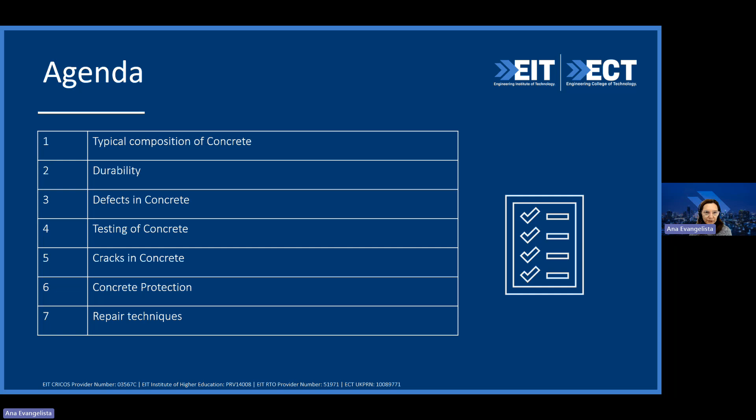So the main point today is to understand deterioration in concrete, because existing structures and sometimes new constructions in a very short period of time show significant defects and deterioration. Just to highlight, when we talk about concrete here, concrete is a composite material.

At the end of the day, we need to understand the characteristics of each component. I believe you're totally familiar with this material, because concrete is one of the most used construction materials around the globe. It's a combination of cementitious materials, normally combined nowadays in different countries, cement Portland plus any type of pozzolanic materials such as fly ash or silica fume, depending on the country. We also have fine aggregates, and we cannot forget air is part of our composite, water, and coarse aggregates.

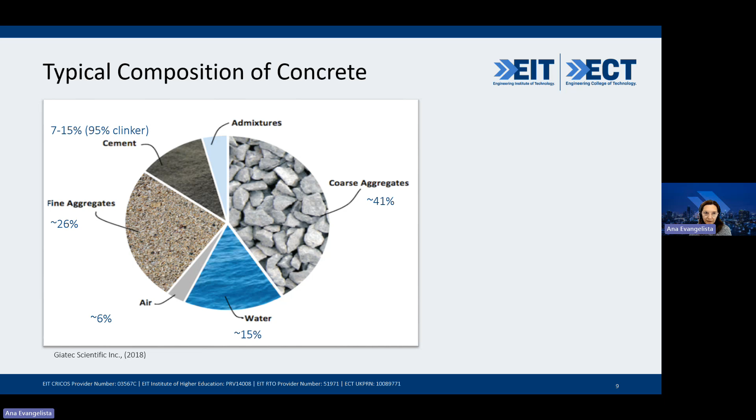Usually, modern concrete incorporates chemicals - chemical admixtures and mineral admixtures. So when you have all these combined, we can identify a variety of characteristics of the final product, and the final product is concrete. So just to illustrate this initial part.

So when we think about existing structures, we need to understand a bit more in terms of the durability aspects. When you talk about durability, straight away you need to think about concrete quality. It also relates to the design, the service life of this material over time. And we just ask ourselves why in some situations we have severe deterioration of concrete, which in future will require more investment in terms of repair, strengthening, and maintenance.

So we have some simple factors to consider here. It can start at the design stage, or in terms of very poor, bad specifications and workmanship. Unfortunately in the construction industry, we still need lots of training for our laborers. I'm based in Australia, but I'm from South America - we can identify this type of issue everywhere.

When you think about quality of concrete, we have a combination of characteristics to keep in mind - permeability, strength. We have the concrete components, as I mentioned, depending on the type of cementitious materials. More and more we are working with a combination of cement Portland plus pozzolanic materials and selection of aggregates. So we need to understand these are the fundamentals of durability.

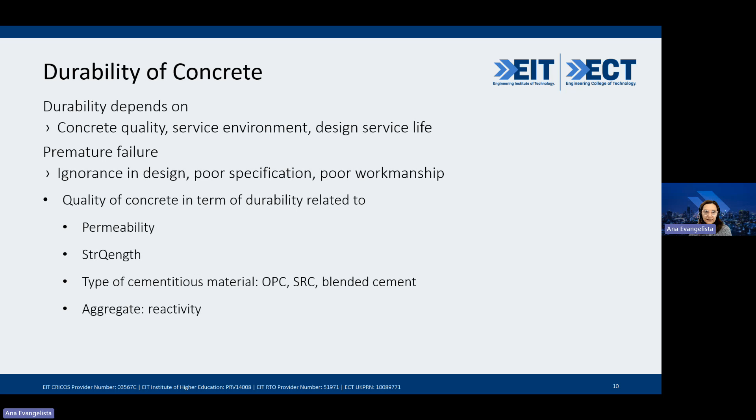A bit more here in terms of concrete permeability - why do we need to understand this? Because this will provide us the fundamentals we need in order to understand what happens in future in relation to simple defects, such as cracks, which you're going to be talking about later on. So permeability in concrete depends on porosity of this material, the pore size distribution, and continuity of those pores. For example, if your structural element is in front of the sea, it's about the ingress of chlorides. Another factor that deteriorates concrete is carbon dioxide - carbonation of concrete.

So my opinion is we need to do our best as civil structural engineers, or if you are working with concrete technology, in order to ensure that you produce high quality material. Because then you can avoid, or at least postpone, this type of defect from occurring. So in my opinion, it's much better to dedicate effort and time to producing high quality concrete rather than doing repairs in future. It's about prevention - if you understand the concepts of how to produce high quality concrete, you can minimize the defects that happen in future.

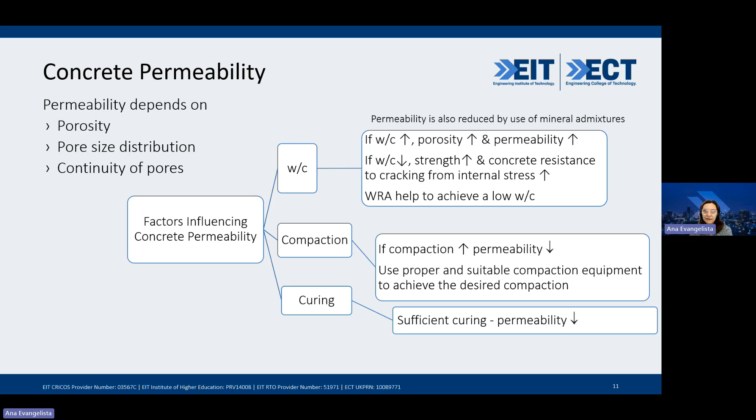Thinking about the structural point of view, aesthetics is something that concerns us, but mainly structural integrity. That's why consequences of this type of chemical attack can include expansion, cracking, and can result in the collapse of structure. So how can we minimize this from happening?

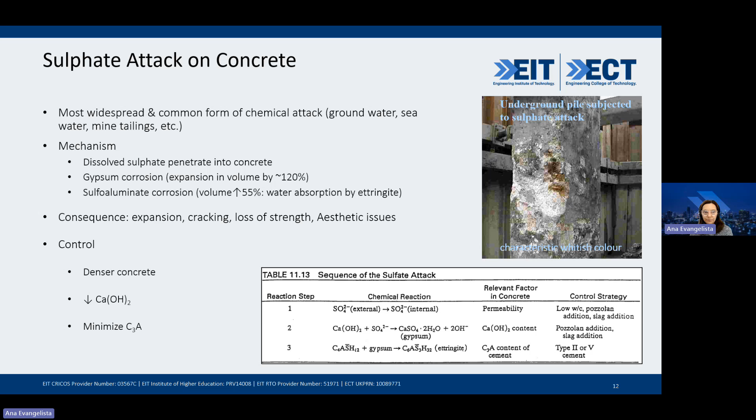Control measures here in order to avoid this happening: denser concrete, when it's about our concrete mix design. When you have a proper mix design, we can produce a denser concrete, reduce permeability, and try to mitigate the ingress of sulfates and minimize the amount of calcium hydroxide and tricalcium aluminate. So these are some points we can highlight about sulfate attacks.

Another problem we talk about here is shrinkage, because in future, when you think about the repair of concrete, we need to think about why cracks occur in concrete. Shrinkage is one of the factors, one of the main challenges we face when working with concrete, because it starts from the fresh concrete.

So when it's about any type of characteristic of concrete that can end up in cracks or other types of defects, we normally have this procedure to follow. We need to understand - I don't need to go one by one here, you're going to have these slides for you later on - but we have a kind of algorithm to follow.

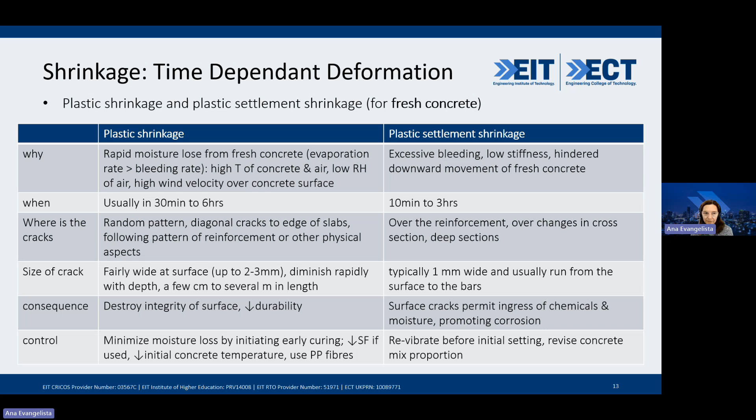Here I'll just illustrate, I don't go into details one by one, but when you talk about shrinkage, we need to understand the different types of shrinkage in concrete. It's from the plastic shrinkage when it was in fresh concrete, but here you also have dry shrinkage, very easy for us to visualize. Concrete just shrinks over time, and you can imagine why cracks happen, because the concrete strength is not at the level in relation to the internal stress applied in concrete. So that's why you have crack formation and propagation.

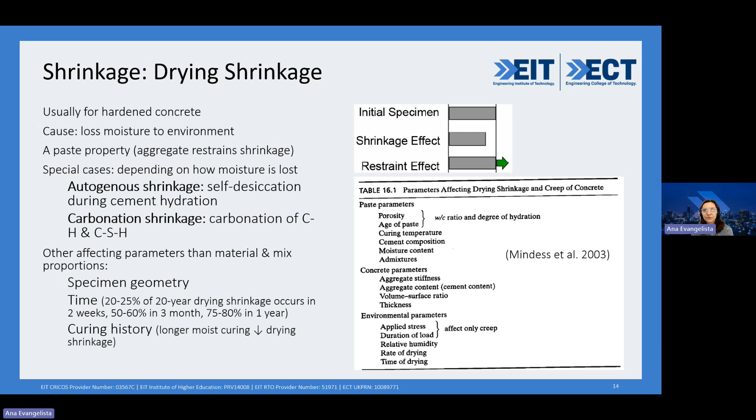The cause - if you have a keyword here, dry - is about loss of moisture over time, and parameters that we can observe in order to prevent this depend on the geometry of your structural element. We also need to think about the curing condition. It's clear, and so many researchers have proved this, and in real life you can also get this evidence: when you have a longer moisture curing, you can observe the mitigation of drying shrinkage.

So on top of shrinkage, we have plastic and drying shrinkage. We need to be very careful, depending on the location of your project in terms of temperature. Deformations in concrete - when we talk about deformations, we just need to think about shrinkage and creep. It's another example of deformation, but here it's still in terms of temperature change.

One of the examples I selected to share with you is when we have massive concrete - let's imagine a huge concrete dam. If there's a significant gradient in terms of temperature, you're going to observe crack formation in a very short period of time. So at high temperature or in a fire condition, no doubt you have a reduction of strength, because concrete has some limits in terms of fire resistance, so we have decomposition of the hydration phase.

So that's why we can identify gradually the deterioration of concrete, and it can go to the level of aggregate, and stress concentrations result in cracks.

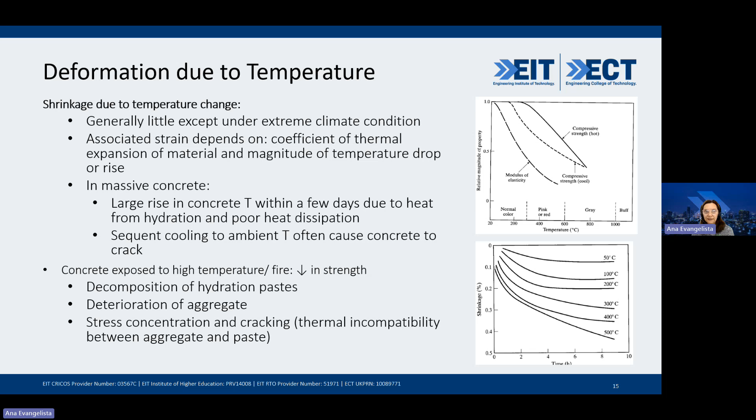So this is about shrinkage, occurring from plastic shrinkage, dry shrinkage, and depending on temperature exposure. Here is more to show you how shrinkage can look like.

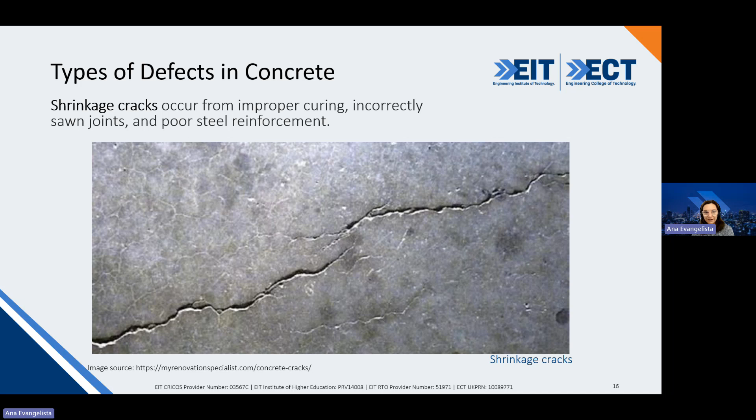Cracks can occur depending on improper curing. To summarize the points on why we covered shrinkage, we need to understand this type of defect occurs considering improper curing, or problems in the joints of your project, structural design, and poor steel reinforcement, because cracks are results of lower tensile strength of concrete. That's why we need to understand the fundamentals of concrete.

There are so many other durability issues that I could talk about for more than 5 hours, but today you have 50 minutes, more or less.

So we have acid attack, alkali aggregate reaction. Can you give me some idea if you are familiar with those other types of durability issues? Just a thumbs up if you are familiar. Alkali aggregate reaction, corrosion—I think you're going to have lots of thumbs up. Everybody knows about corrosion. Carbonation, when you have ingress of carbon dioxide in your concrete structures. Chlorides, freeze and thaw cycles, and biological attacks as well.

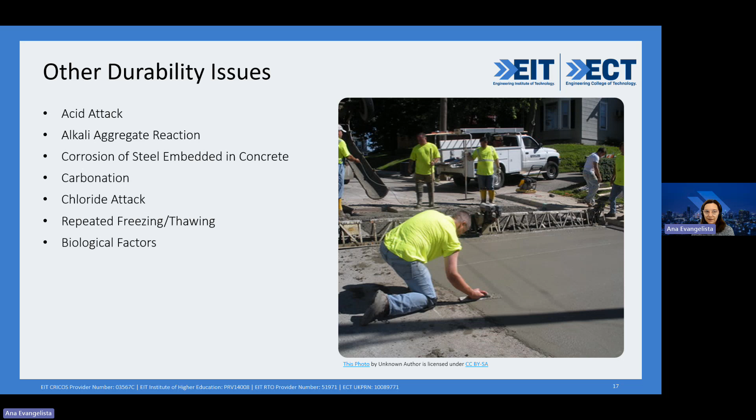Straight away, you can identify something must be done here, right? Otherwise it can progress. If it progresses, in reinforced concrete the corrosion will start in a very short period of time, or may have already started.

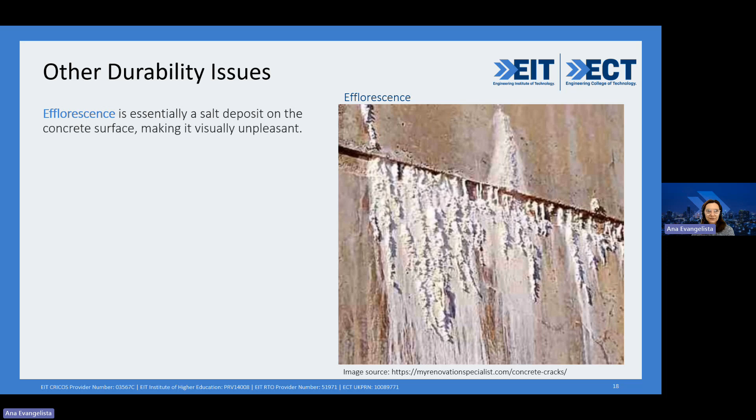And cracks formation and propagation. We're going to talk a lot about crack formations and propagation. We're going to get there on the materials and repair techniques.

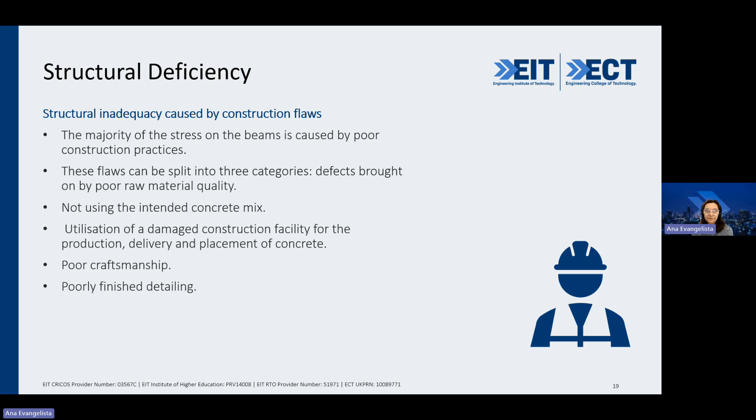So as you all know, in order to ensure what's happening with the concrete in situ, we have some types of tests that you can conduct. For today I'll just mention this one, in order to identify the level of strength in situ, but we also have ultrasound and modern techniques to get inputs on the characteristics of concrete in situ.

As you asked how to fix it, efflorescence sometimes is more about aesthetics, but if you dig down and understand the level of strength of the concrete in situ, it can become a need not only for repair, but for strengthening as well.

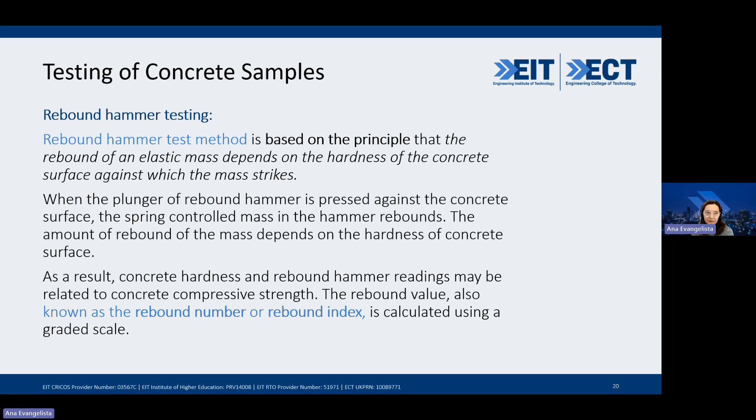The other point is, to illustrate more, we need non-destructive tests and other techniques to analyze what's happening with the structural element, and then we can prescribe treatment. It's like when you go to your doctor—first you need to understand what's happening with you, and then the doctor can prescribe treatment, right? So we cannot jump to treatment if we don't know exactly the cause, and that's why this is the investigation phase.

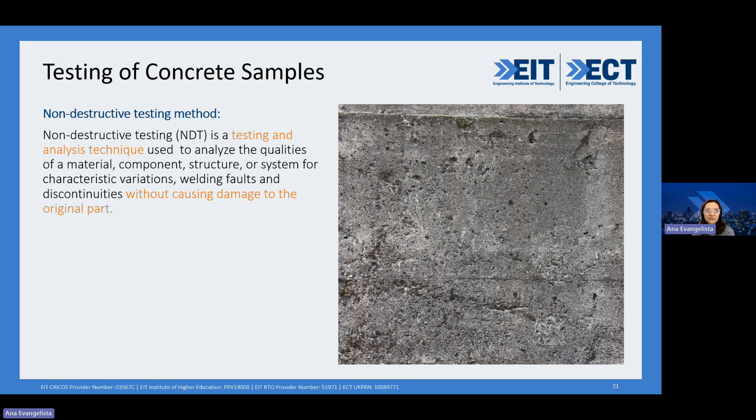So it depends on the system, which can present some discontinuities, and then we can have cracks. Yes, this is how you can understand the reasons for cracks.

As I mentioned, if you understand the cause, then we can prescribe the solution. So we have a variety of situations that we can identify crack formation and propagation. Here, for example, we have improper subgrade preparation or earth compaction, settlement, inadequate or improper curing.

This is very common, right? We have standards to follow. We need to ensure why curing is important to avoid crack formation. As I mentioned at the very beginning, you all know we have our concrete mix. Concrete is delivered in situ, and over time you can see the strength development gain. When you have the critical 24 hours, 48, 7 days, if you ensure the moisture in your concrete, you can ensure a proper strength development gain.

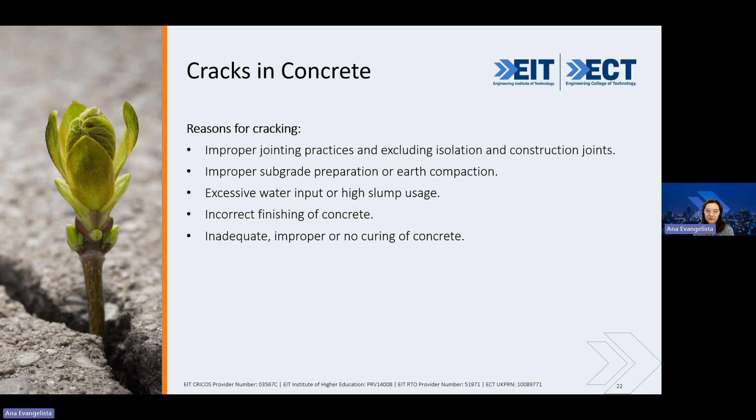When you do this 7 days, 10 days of a proper curing process, the main point is to minimize the probability to observe cracks in future in your concrete. If there's no proper curing, this is a very simple control that we can just pay more attention to when you are a site engineer, for example. Incorrect finishing, excessive water - why excessive water? Because we also covered before, we have drying shrinkage as another cause of crack formation.

But now let's look at the construction practice. What can be done in order to minimize crack formation here, based on construction practice? When you have the workability of concrete, it's very common if you don't control the amount of water in your mix design, because the majority of us, when you are a site engineer, want your laborers to work easily with concrete.

That's why workability is critical. But if you don't balance this, you observe the increase of the amount of water to make concrete easier to mix. So this will lead to a reduction of strength and increase the settlement of concrete. Plastic shrinkage, dry shrinkage - just observe they all occur at the same time, right? Not separately.

So the other point here is the gradients in temperature, depending on your location. For example, here in Perth, it's summertime. During the day we go for 40 Celsius, and during the night, 15. So those gradients can also affect the quality of our material in terms of temperature, especially when you are doing the concrete during severe conditions.

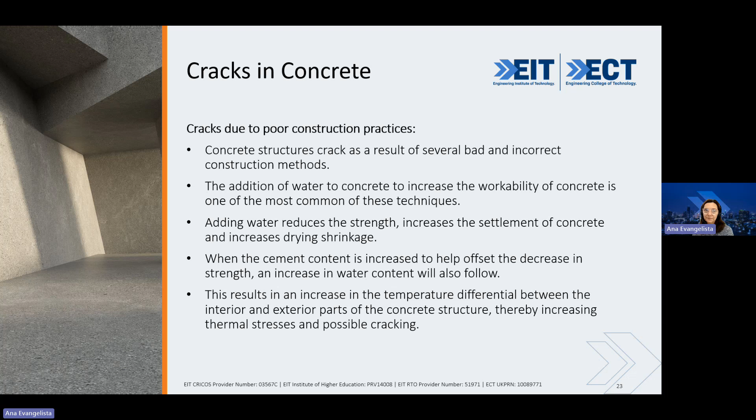So it's better to ensure a proper procedure during the construction stage.

So cracks in concrete - we mentioned at the very beginning about concrete as a composite material. More and more we know that when you have cement Portland plus water, it's a chemical reaction, it's an exothermic reaction. That's why when you replace part of the cement Portland by fly ash, for example, you can have mitigation and you can observe some reduction in terms of the heat of hydration. All this can reduce the probability of cracks in your concrete.

Also here, during the hydration, when you think about long-term characteristics in terms of strength and durability of concrete, everything that you pay attention to here at the very beginning will ensure a long service life of your structural element.

Another point that can lead to cracks is about formwork support, consolidation, placing, and joints in high stress areas. So sometimes the problem starts in the design, the structural design. If you don't have some proper reinforcement in critical areas of stress, you all know that you're going to end up in crack formation in future because of the excessive stress.

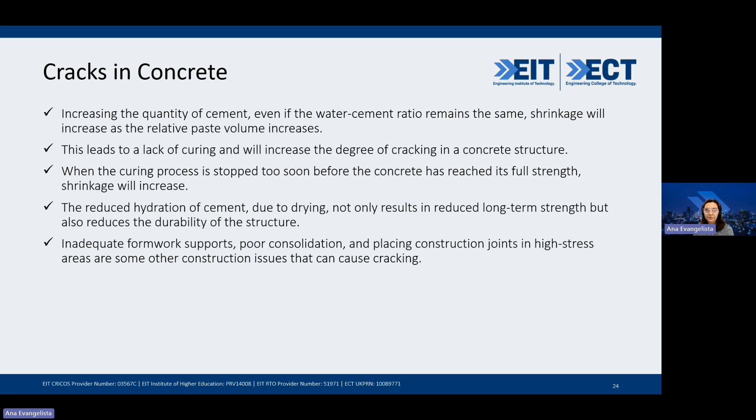That's why I highlight this summary in terms of errors in design and detailing, especially when you have corners, or even with precast elements, you also need to observe this, because it can lead to cracks.

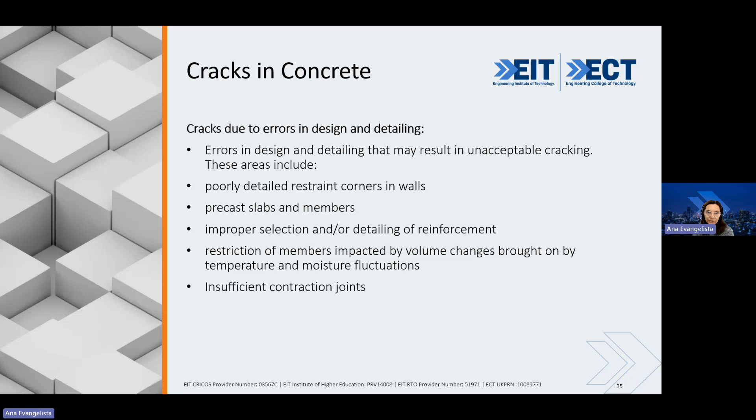In the contraction joints, joints are critical. If our material needs joints, but concrete will deform over time, and if you don't have a proper joint, stress will be generated there. This internal stress will lead to cracks. So all those are important points to keep in mind.

Here you have some other points. If you have slabs or walls and they are restrained, even if they are pre-stressed, they can develop tensile stress. This is what I'm trying to highlight here. Tensile stress is the cause of cracks. And why we need to know this?

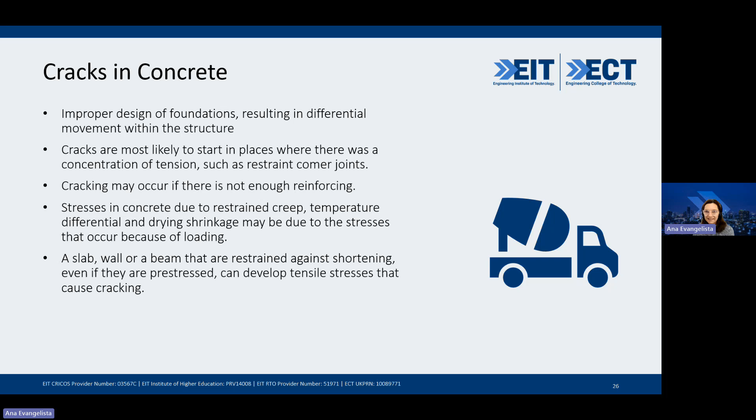Because we need to know how to fix it. In order to fix it, we need to ensure the concrete recovers the capacity to resist tensile stress. This is the weakest point of concrete in terms of its properties. Concrete is not the best material to resist tensile stress, right? You all know this.

So here you also have differential movements. Very small cracks can occur - this is another point we need to keep in mind. Sometimes with differential movement and settlement, the structure cannot redistribute loads. If the structural element is not capable of redistributing loads, it ends up in failures.

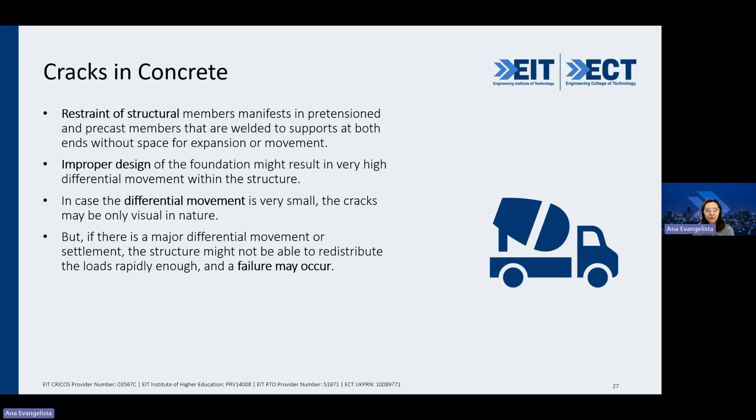So that's another cause. Now we're going to talk more about the repair methods until the end - methods, materials - but now you understand the causes. We can have a better understanding of how to treat it or fix it as much as possible.

The system has some fundamentals. We selected 7 fundamental steps for repair methods. Step 1: identify the damage, otherwise how can we prescribe solutions and treatments. Severity of damage - as we could see, it can be simple with efflorescence, you can clean up and add another layer of concrete, mortar or grout, but depending on the severity, it can go to the structural level.

So, necessity of repairs determined by in situ inspection, and combining all this we can do analysis and identify a suitable technique and materials in order to repair, or if needed, enhance the strength of the structural element. You can have strengthening techniques as well, starting with a strategy and completing the cure of repair.

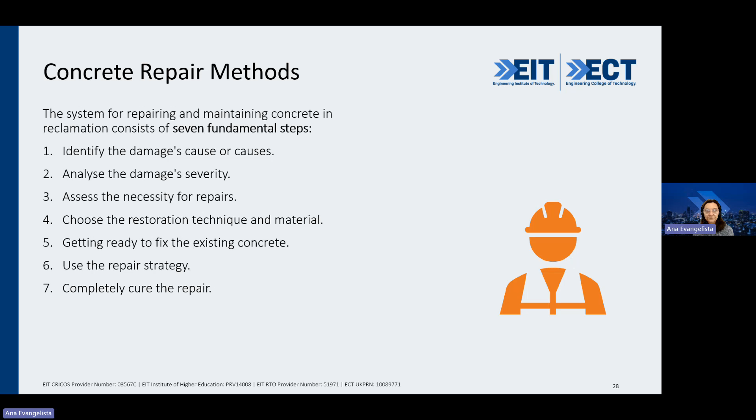When you are working with new concrete, you need to ensure proper curing conditions. So in terms of repair methods, one of the most traditional ones is epoxy injections.

It depends on countries and locations - you have a variety of materials available, different epoxies that can be used in order to seal the cracks. Epoxy injection is one of the most traditional methods - it seals the cracks on the exposed surface. So epoxy injection is one alternative.

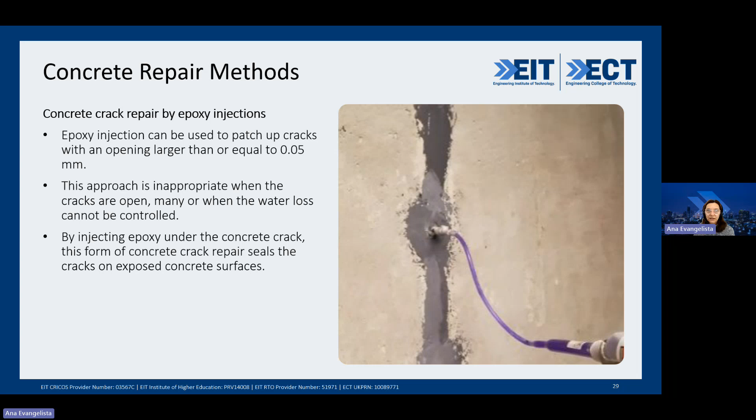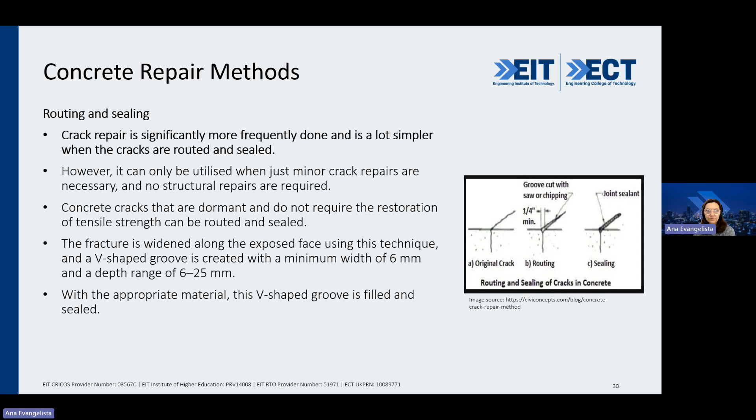There are other, more modern techniques that I selected to share with you, but I'll share this video with you later since it's not very short. In terms of trends and modern technology for sealing, especially when working with pre-stressed concrete beams, this is a cutting-edge technique - researchers worked with ultra high performance fiber reinforced concrete. This is one of the modern techniques you can use.

Modern techniques still need time to come to life and be applied in the industry, but it's important to highlight new materials. Ultra high performance fiber reinforced concrete can fix very small cracks and post-cracking. This material ensures both mechanical properties and durability, exceeding traditional concrete characteristics.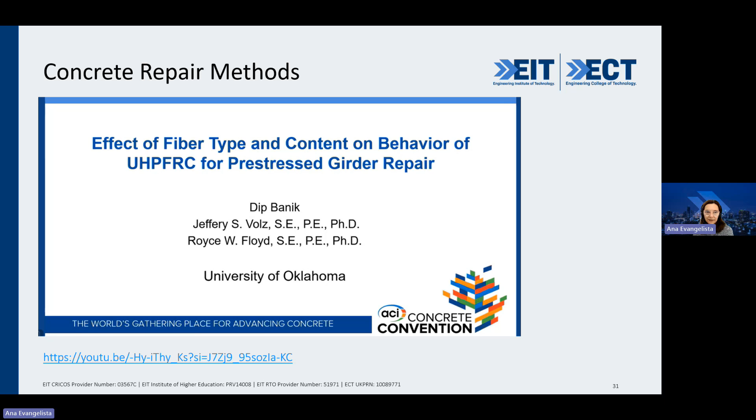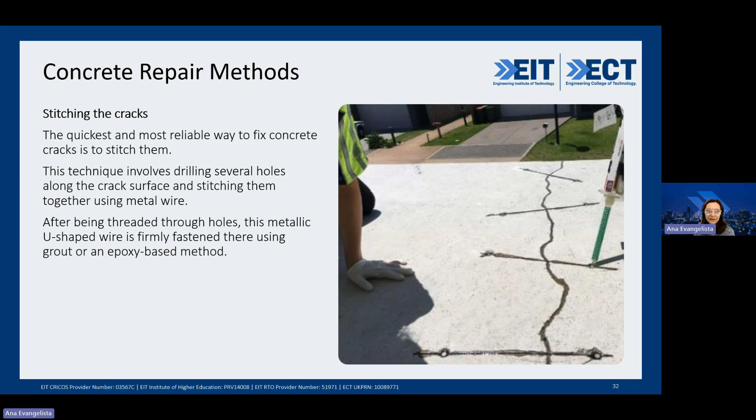Other options I selected to share with you in terms of repair methods is stitching of cracks. This is one of the reliable ways to fix concrete, like a stitch, as you can see here. If you've faced this before, had experience in your workplace, or had the opportunity to visualize this type of service, let me know - yes or no in your chat box. This is something that can be done in terms of methods.

In terms of repair techniques, I illustrated some of them, but now you can see the list of repair techniques. It can go to the level of voids in concrete when you have porous concrete - majority of times about injection of resin, but other techniques such as cut and repair. When you have cracks from the top of the reinforcement, majority of the time it's a question of recompacting the concrete when it's still plastic. Some alternatives can be done when it's still in a fresh condition.

And lack of cover - we can apply lack of cover. Why is it a problem? Lack of cover to reinforcement. Can you put in the chat box why it is a problem? The consequence - what is the consequence? Why do you need to apply a protective coat? Consequence of lack of cover - just think about this. Yeah, 100%.

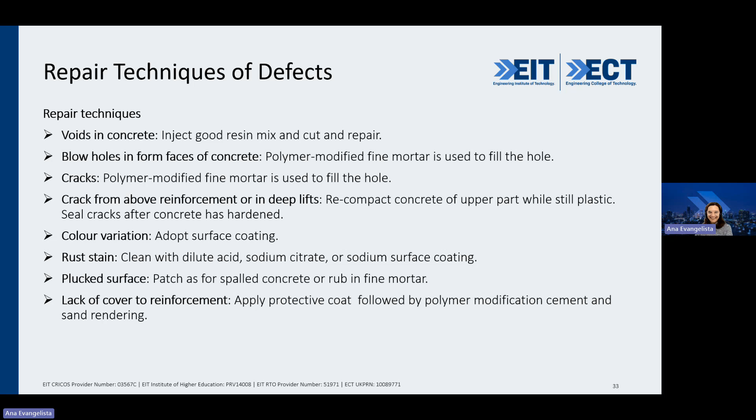This is another problem, you can see here. What's the main issue about a lack of cover? As I can see, there is no miracle here. If you start from when concrete is delivered in situ, if everything is done properly, you can mitigate all this. Repair will definitely be there, but you can postpone this.

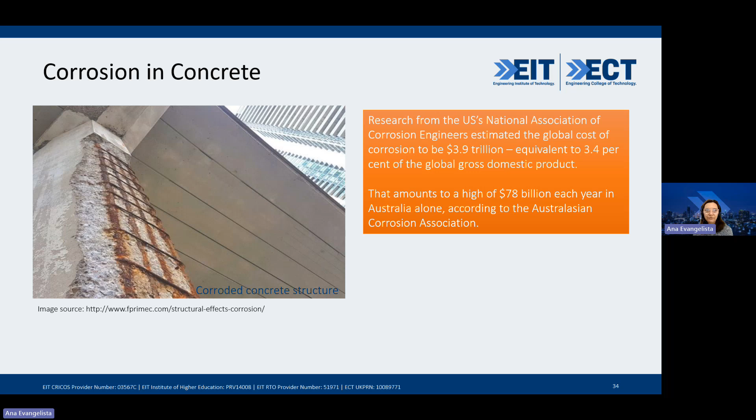So corrosion, this is another critical part here. Corrosion, as you can see, it's not only about aesthetics - it's about deterioration of your structural element and structural integrity, and the cost of corrosion. Engineers are trying to work with new coating materials just to mitigate this situation. When it's a very severe environment, you can imagine the difficulties to inhibit corrosion and the amount of money needed for this. So corrosion is one of the main factors of deterioration in concrete.

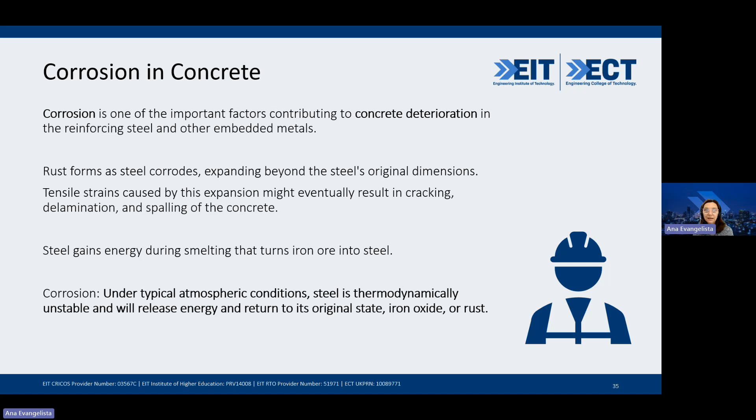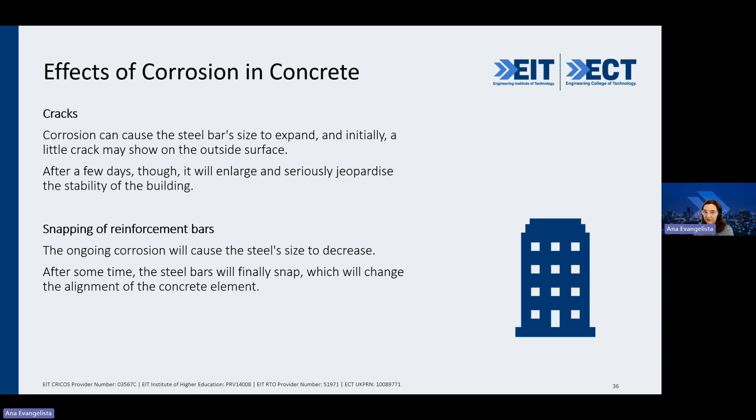It depends on the severe environment - it's still thermodynamically unstable, and it's about the corrosion mechanism. Why are we concerned with corrosion? Because it ends up in cracks, right? And the cracks, even starting small, if they progress, compromise structural integrity. And if you compromise structural integrity, we don't want the collapse of our buildings or bridges. This is the main point for us.

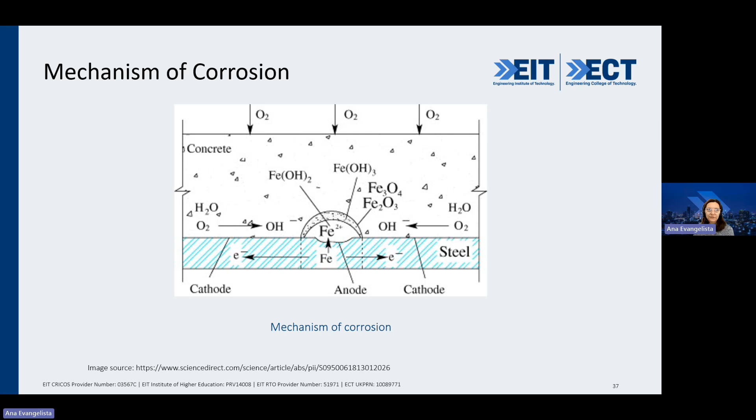You have some illustrations in terms of corrosion mechanisms, so you're going to have these for you to understand in detail later on. But you all know concrete - if you have lower permeability, lower porosity concrete, it's a protective layer for your steel. But when it deteriorates, when you have oxygen, water ingress, or chlorides, the corrosion process starts. This is one of the points and stages of corrosion, some illustrations for you.

And prevention, assess strength reduction. Yes, in situ it's possible to do this. That's why with in situ tests we can also identify the level of corrosion, which relates to the resistivity of concrete. We can have this type of correlation between strength of concrete and corrosion.

But as you know me, you'll really understand why I highlight prevention, because you avoid excessive cost in future. So for prevention of concrete corrosion, the quality sometimes depends on contaminants in your materials. I'm not sure if you heard about it, but sometimes buildings collapse in cities in coastal areas because of the sand, simply. We cannot imagine it happens, but if the material used is sand with lots of salt, what's going to happen with your reinforced concrete?

So clear cover and epoxy coating depend on the type of project, the complexity of the project, the severity of the environment, and how your structural element will be exposed. You can go to the level of epoxy coating in order to reduce or mitigate as much as possible the corrosion process. There are also techniques such as cathodic protection and anodic protection, and you've probably heard about this. We also have paintings, for example the most common one involving zinc. When you have zinc painting, the zinc will corrode and protect the steel. So we have those techniques.

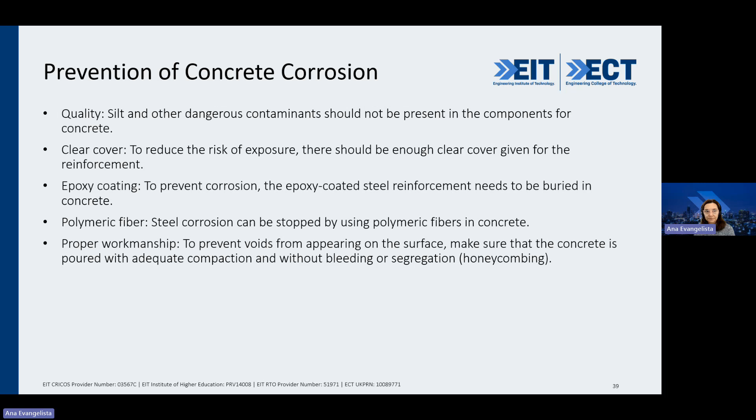And here are some techniques for testing. We have the half cell potential - this is what I was trying to explain before when you asked about the correlation between corrosion and strength. There are techniques in situ that let you understand the level of corrosion, and you can have a contour map of the corrosion. We can map everything in situ without the need to start drilling holes and causing some damage to your structural element.

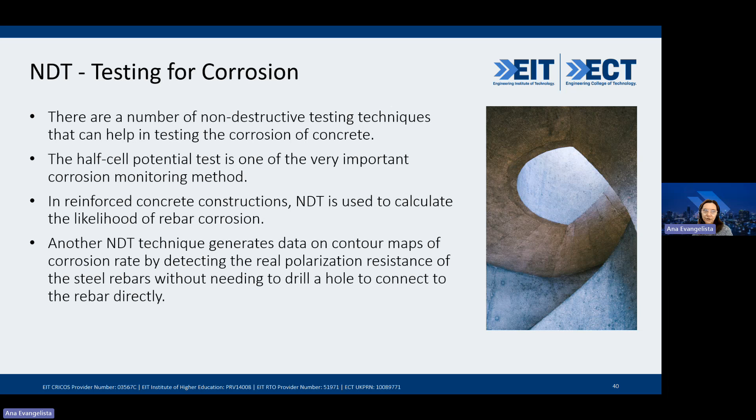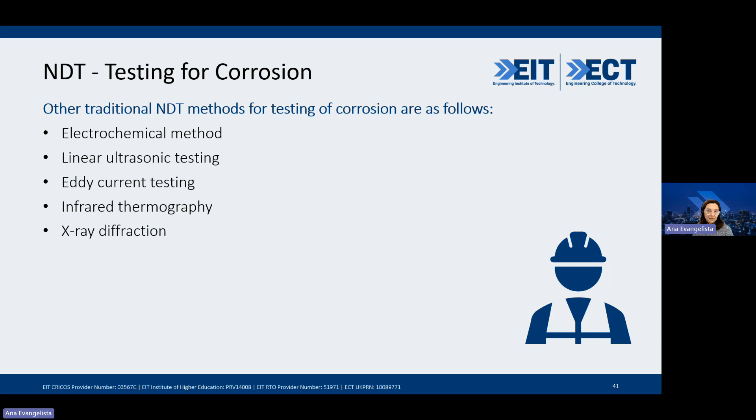We also have other examples for you to evaluate corrosion, in terms of ultrasonic testing, eddy current testing, and infrared thermography. As I told you, these are non-destructive tests - you have so many new equipment coming to the industry in order to identify all these defects in situ.

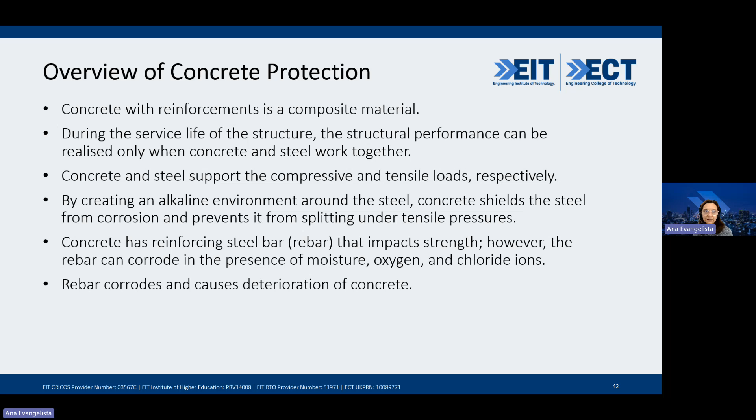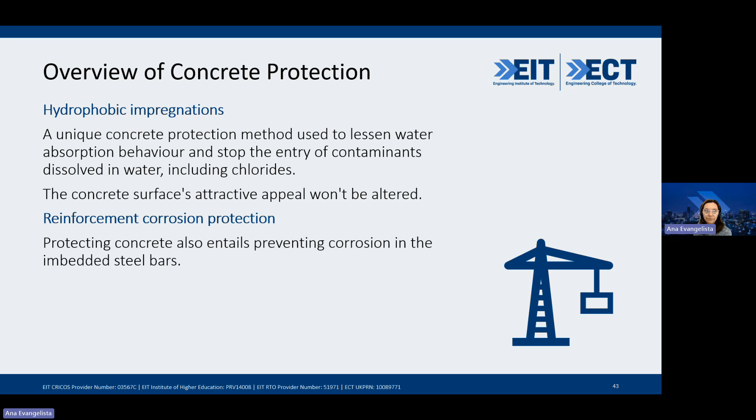In terms of protection, reinforced concrete is a composite material, and concrete is the one that can protect the rebars. There's nothing very difficult to understand here, but another technique in terms of protection is hydrophobic impregnation. Why do we need this? In order to ensure that we don't absorb a significant amount of water from humidity, to stop the ingress of contaminants. The common type of contaminant is chlorides, depending on the environment. So protection can prevent issues - naturally concrete protects the steel bars.

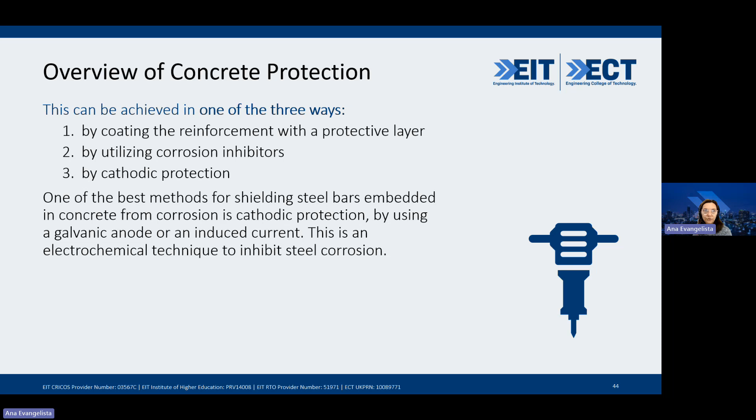This type of protection can also be achieved in different ways: by coating, as we mentioned before, or by application of corrosion inhibitors and cathodic protection. All of these are good alternatives. Let's have a look at them one by one.

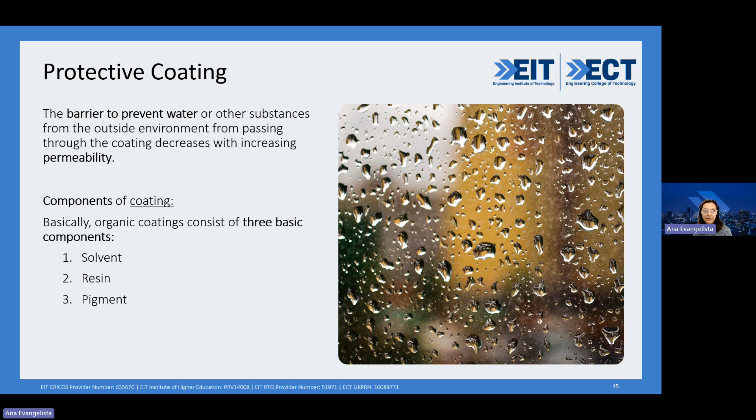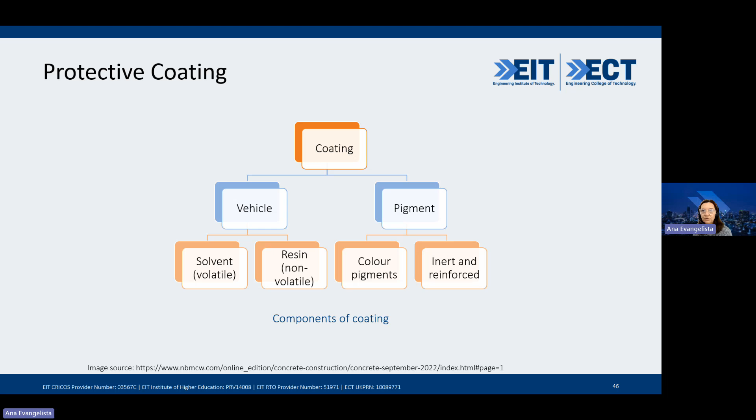Here we have protective coating. As we can imagine, this is mainly to prevent water and other contaminants from ingressing. It also has some components - these protective coatings are based on solvents, resin, and pigments, and those are the main components. When you talk about coatings, in terms of the vehicle, vehicles are the solvents or resins, and the pigments can be color pigments, inerts, and reinforcements.

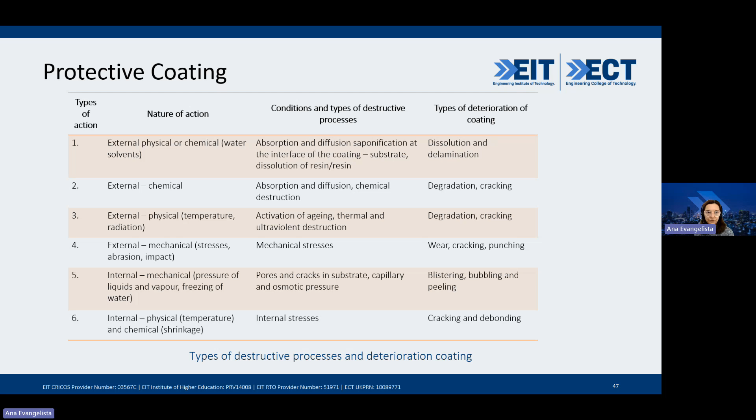Sealing concrete is a protective covering that can use a sealer like acrylic or epoxy to minimize or mitigate the amount of water ingress or contaminants. These penetrating sealers have a resin that, in a porous surface, can build up and become a protective layer. So there are some different options here to seal concrete.

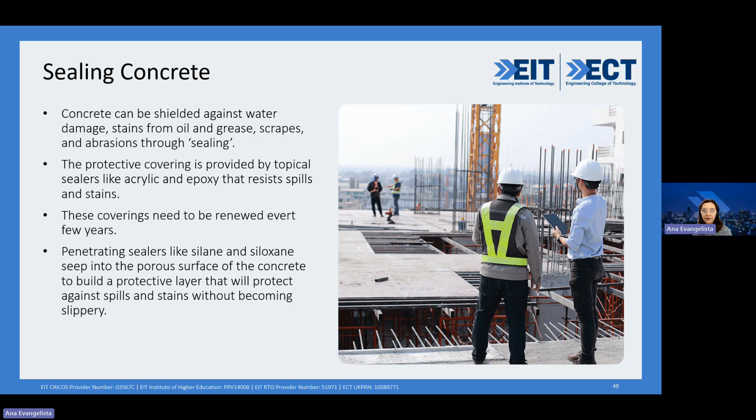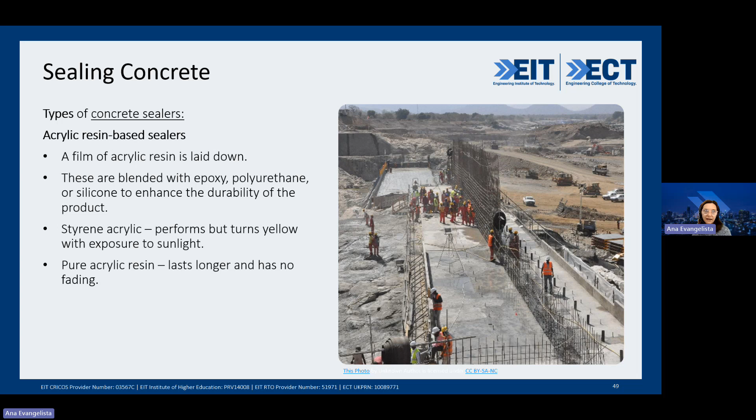In terms of specific applications for sealers, I'll provide some examples: resin-based ones like acrylic and styrene acrylic. As I mentioned, you just need to understand the techniques, but the materials available depend on the suppliers in your specific country and location.

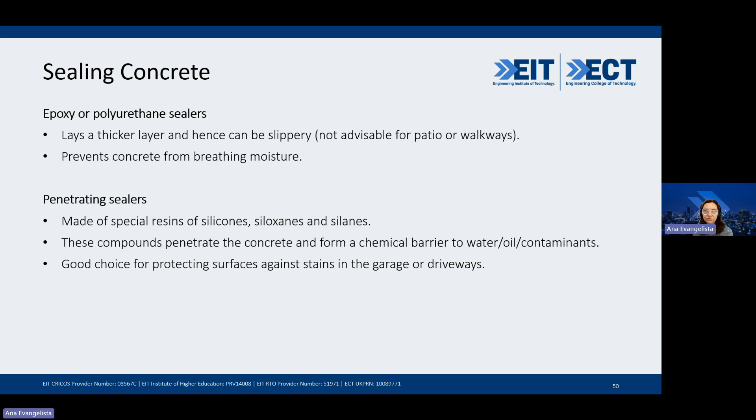I encourage you, step number one, to understand the cause of why it happens, and then familiarize yourself with the materials available to repair the concrete if you face this type of issue. This gives you better knowledge to select the type of material according to your needs. We also have epoxy and polyurethane sealers, penetrating sealers based on resin silicones, and so on - a good choice when the surface is against stains in garages or driveways, depending on the circumstance.

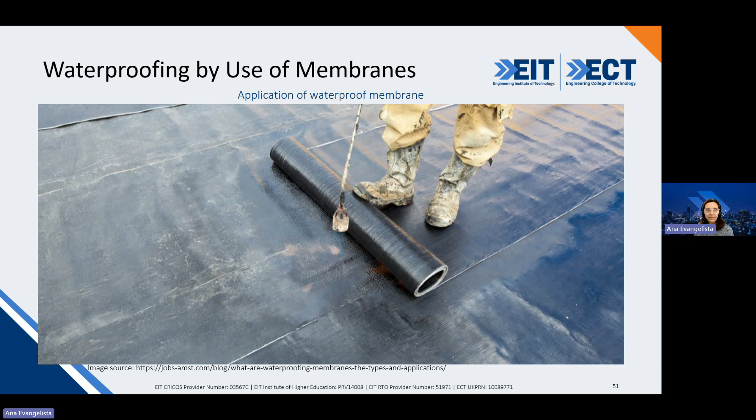The main challenge is to avoid ingress of contaminants and excessive amounts of water. So waterproofing is one of the simple alternatives, depending on your project. We have applications of waterproofing here. Why is this important? Because it's the only way to protect the concrete from deterioration over time, if you avoid the ingress of chemicals and contaminants.

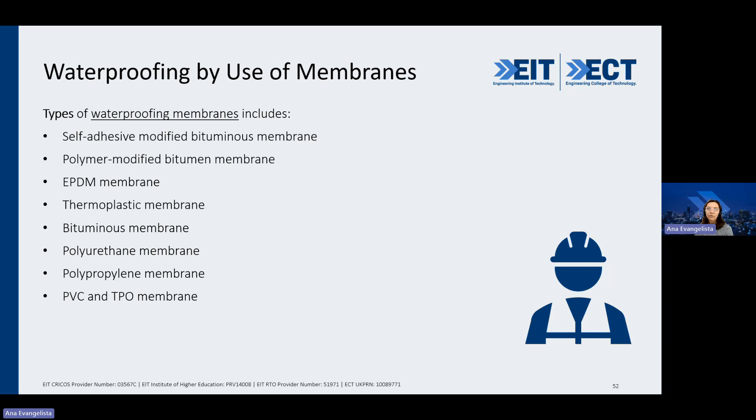There are a variety of waterproof membranes based on polymers, bituminous materials, or PVC. Again, it depends on what type of materials are available in your countries and cities. I also selected this application, and there's another video I'll leave with you because this is a real case study of a concrete repair application.

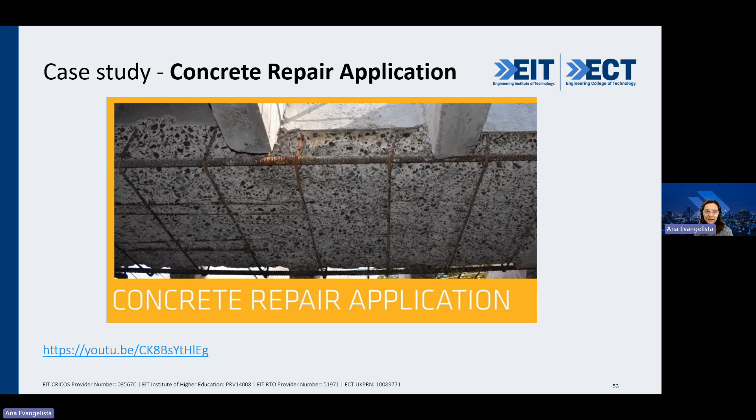We have traditional brands around the globe, and this is one of them, but I truly believe this is going to be very important for you to have a look at. You're going to receive all of this, and I'm happy to answer if you have any doubts or questions - we can discuss now, or in other opportunities you can email me. It's up to you.

I know this was a brief technical webinar, but I really enjoyed this opportunity to share my knowledge and perceptions about concrete characteristics with you. I hope you enjoyed it, and I wish you all the best. Thank you very much for your company.